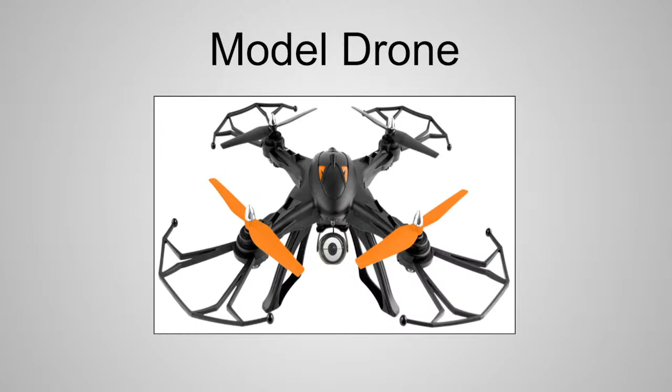Here we have our rough hand sketches of the main parts. We have our main body, including the motors, the landing gear, and the propellers.

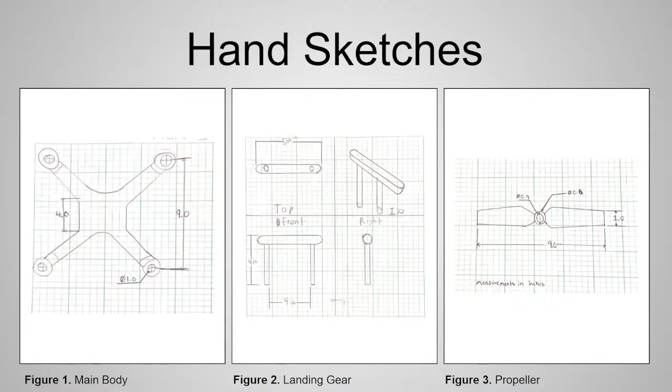This is the main chassis of our drone that makes up the main body. It consists of 4 arms that extend from the main body that each contain a motor mount, which is a cylindrical hole for the motor to slide into, allowing for the completion of the drone. It's also equipped with 4 smaller holes on the bottom of the drone that allow the landing gear to attach to the drone, giving the drone a safe and stable base to land on.

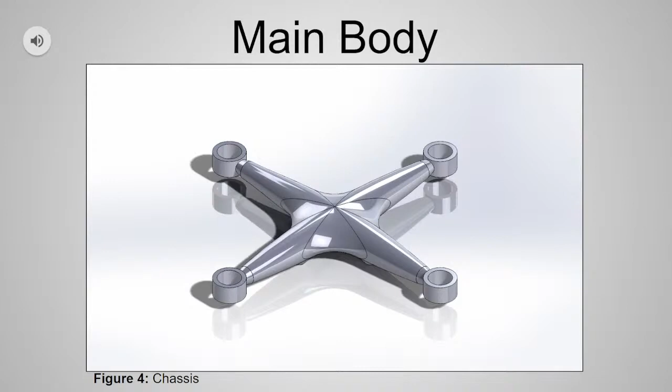This is the landing gear for our drone. As you can see, the bottom consists of a rudder type of base that will contact the ground, keeping the drone safe. Off of the rudder come 2 poles that are used to attach the landing gear to the drone. We only have one side on display here, but because the sides are identical, we can just use the same part twice to connect to the drone to give it an extremely steady base to land on.

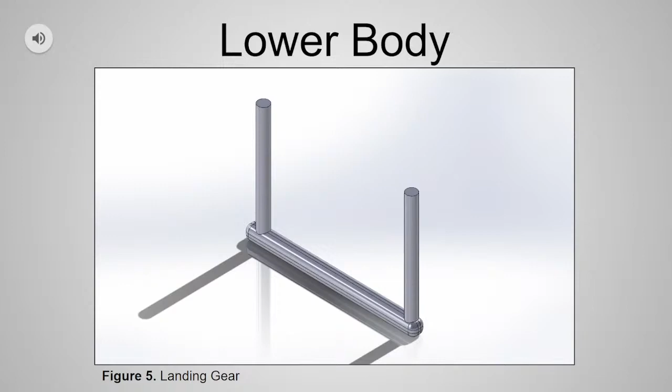The last of the 4 parts that it took to complete this drone build are the moving components. This consists of the motor and the propeller. The motor clicks into the chassis of the drone, and then the propeller clicks onto the top of the motor, allowing the drone to fly.

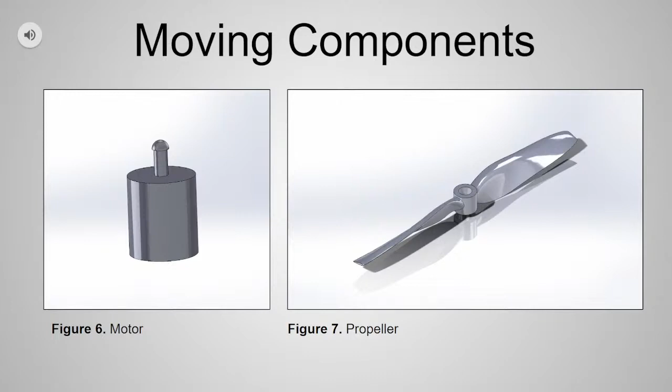Figure 8 shows the completed assembly of the drone. Creating this design required skillful use of lofts, splines, and fillets. The landing gear is attached to the base, and all 4 motors and propellers are working.

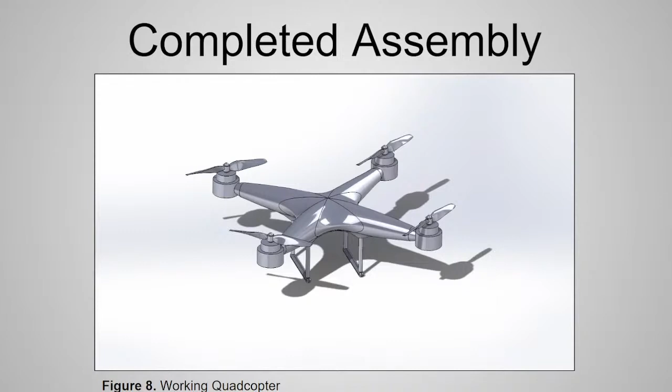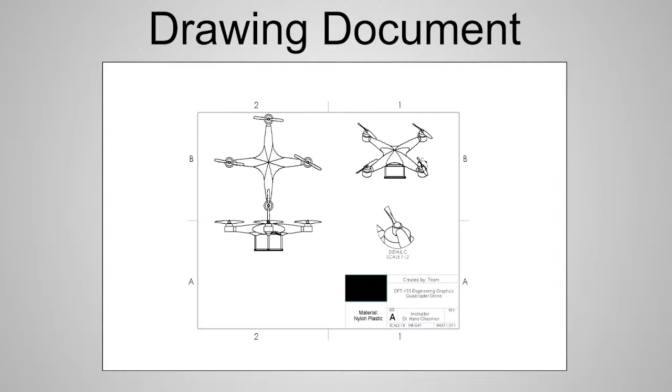This drawing document showcases the front, top, and isometric views, along with a detailed view of the propeller. The right view was left out as it provides no additional information.

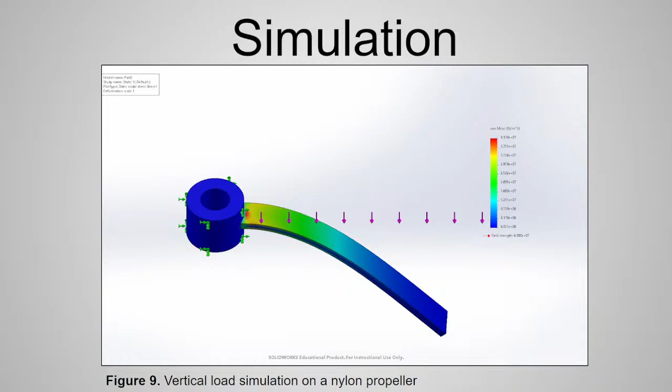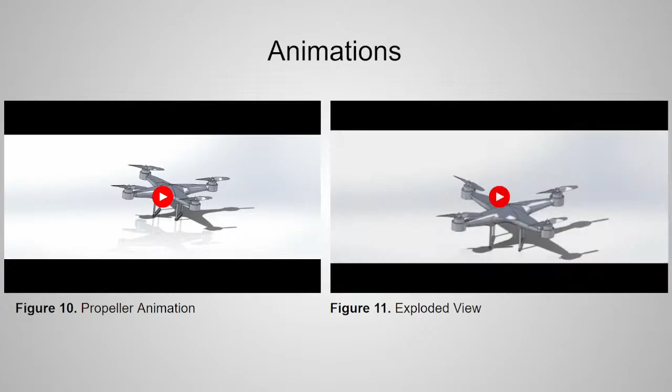In conclusion, we decided that planning ahead and brainstorming is essential. Ideas and designs must be coordinated between the group members. Objects with complex contours are difficult to model and simulate, and one should consider exactly which tools will be needed in SolidWorks before deciding on a project.

Our takeaways are that we improved our ability to plan, model, assemble, and animate in SolidWorks, and that understanding team dynamics is important for overall success.